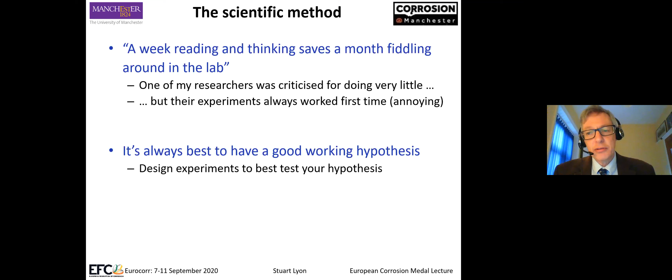One of my researchers was very much criticized for apparently doing very little by his colleagues, but his experiments always worked first time, which was very annoying to his colleagues as well. That's because he spent all the time thinking about what to do, designing the experiment correctly, testing his hypothesis using a thought experiment, and then running the experiment properly first time. That's really a good idea to go through life. I can't guarantee that all my work has been like that, but hopefully some of it, or some of the most important parts of it, have been.

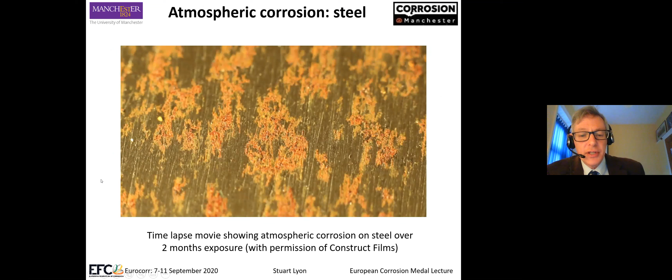So what do I work in? Well, I'm running through a program of atmospheric corrosion. I was hired to do atmospheric corrosion. And this rather lovely movie shows atmospheric corrosion on steel over 2 months exposure.

As you can see, we can see apparently filiforms running across the surface. This is not a painted piece of steel, this is just bare steel being time-lapse photographed. We can see these little filiforms running all over. We can see little deposits of salt here. After 2 months, significant parts of the steel are still bare. So these are obviously where the anodes were, and maybe these are cathodes, or maybe they're passive - we just don't know. I love that so much, we're going to run it again.

So if you're not seeing corrosion in action, this is corrosion in action. Atmospheric corrosion is a fascinating subject because it is so potentially difficult.

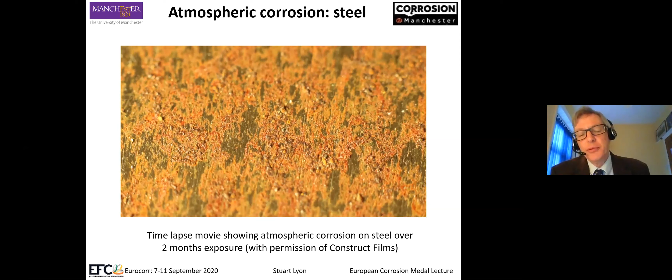The corrosion rate of steel in the atmosphere is quite similar to the corrosion rate of steel immersed in seawater. Why would that be? Seawater should be more aggressive than the atmosphere. So there are many interesting questions.

We needed to prepare naturally rusted iron samples for an experiment I'll show you shortly. We put 16 wires embedded into an epoxy mounting resin, put them on the roof of our lab in Manchester, roof of the building I showed you earlier, and we expected them to corrode within a week. However, after a week, only 4 had corroded and 12 were uncorroded.

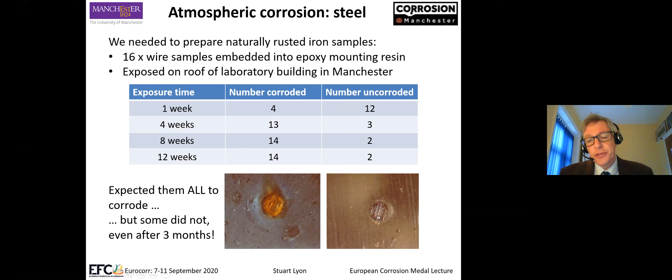Even after 3 months, 2 of them were completely uncorroded. The rest of them were all rusty. That's quite interesting as well. Why would that happen? This implies that there is something controlling or stopping that corrosion from occurring, probably because the material is passive.

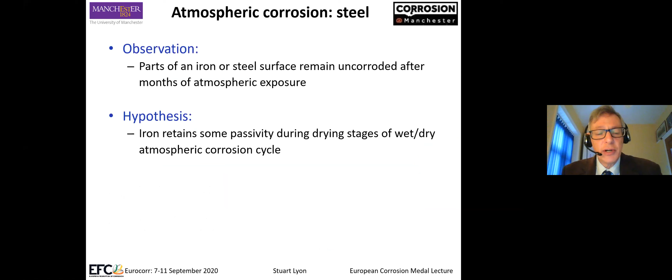So based on this observation, one of the hypotheses I ran with first is that iron or steel retains some kind of passivity during the corrosion process in the atmosphere of wetting and drying. If we have evaporation condensation cycles, we can see after a very short period of time, 4 to 5 wet-dry cycles, the steel reaches a passive state.

If we do electrochemical experiments in really dilute electrolytes, this is 10 to the minus 4 molar sodium sulfate, then the passivity becomes easier as the electrolyte thickness decreases from the bulk to the 100 microns.

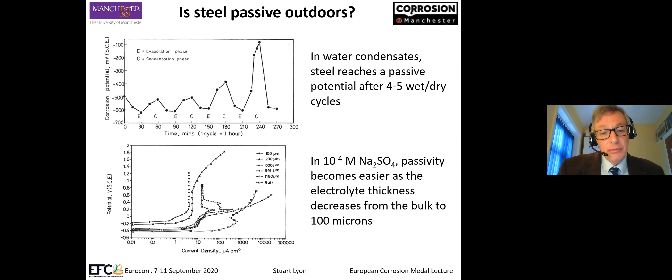A question that came up with the review of the paper was whether this is all IR drop in the electrolyte. So we check that by increasing the electrolyte concentration by adding 2 drops of 0.1 molar concentrated sodium sulfate. Passivity stays the same, IR drop is reduced, and we retain passivity.

However, if we add chloride, it immediately starts pitting and we get a big increase in current. So the material is indeed passive under these conditions.

Going on from atmospheric corrosion of steel, Evans' electrochemical theory was based on the redox cycling of iron oxides during atmospheric corrosion. Again, a hypothesis arising from the Evans model is that the reduction of iron oxides formed during corrosion is kinetically faster than the oxygen reduction reaction.

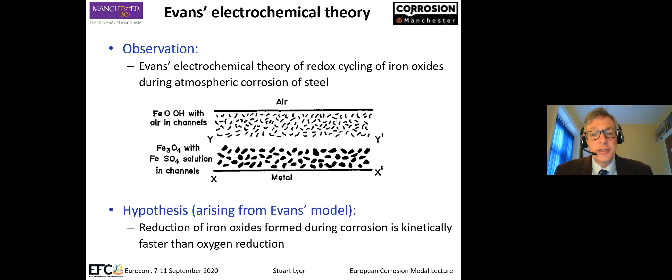And again, we check that. You can see now why I wanted rusty electrodes, small electrodes on the surface of the sample. Here is our shiny uncorroded system, freshly polished. So this is the oxygen reduction reaction. It's about 50 microamps per square centimeter, which is about right.

For a small electrode, you have radial diffusion, which increases the nominal rate. However, on a rusty surface, our corrosion rate, or our cathodic current at the same potential, is much, much higher. The only reason that can possibly be is that the reduction of iron oxide is kinetically a lot faster than the reduction of oxygen.

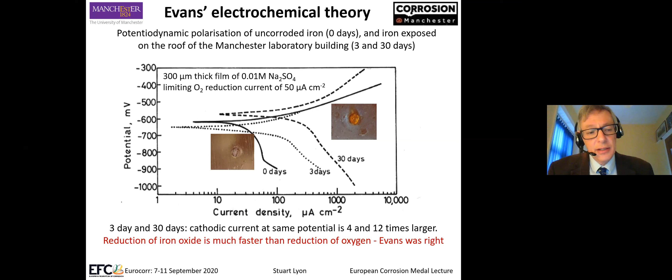So Evans was not able to do this experiment in his day, in the 1960s, but he was right. He had great prescience.

Moving on a little bit further, now on to stainless, still passive materials. This research came out of the nuclear industry, where they're interested in retaining nuclear waste in stainless steel containers for forever, essentially. And they were running with this comment, which is very, very common.

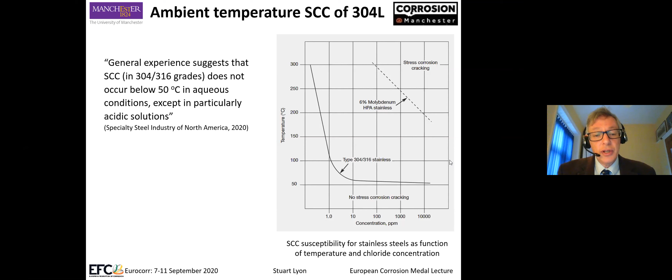General experience suggests that SCC of stainless does not occur below 50 degrees, except in particularly acidic conditions. And this is still being stated by the SSINA in 2020 on their website. That's a wonderful thing if it was true. Unfortunately, it's not true. It does happen.

This is 50 degrees, less than 50 degrees, and we can see underneath insulation, we do get stress corrosion cracking, but we get stress corrosion cracking even in the absence of insulation in a service environment where the temperature is well below this 50-degree limit. The question is why that is.

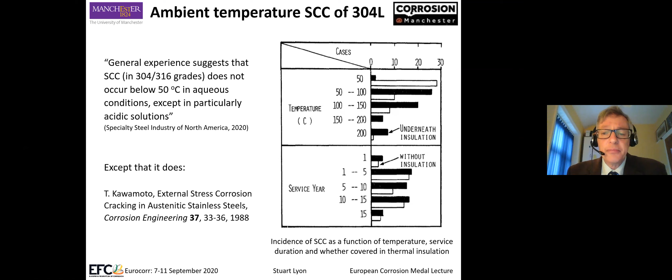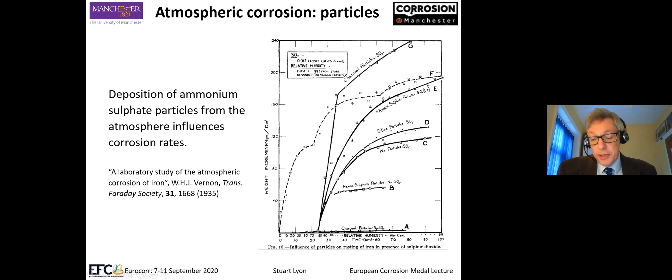So you then have the hypothesis that since ammonium sulfate isn't present in the atmosphere anymore, perhaps it's sea salt particles that give rise to this ambient temperature stress corrosion cracking of austenitic stainless steel, because it's well known that particulate deposits can influence atmospheric corrosion.

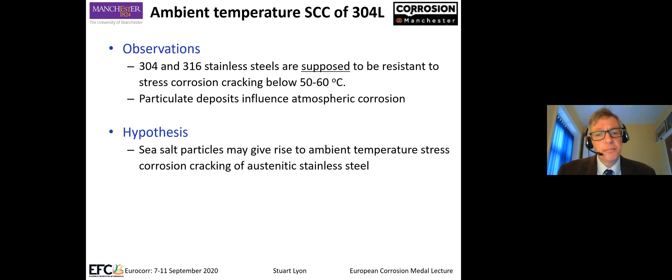So we did this small tensile experiment using a proving ring with this wishbone sample, bow tie sample. At 40 degrees centigrade, although we've run these experiments down to about 20 degrees centigrade, the initiation time for cracking just takes longer and longer.

So at 30% humidity, most of the sea salt solutes have precipitated. You're just left with about 6 molar magnesium chloride. So if anyone does experiments at boiling magnesium chloride, it's about the same molarity.

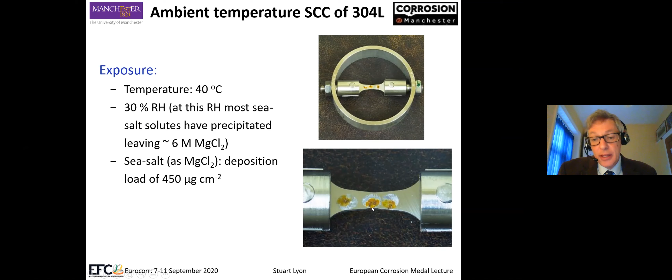So you can see these samples have cracked here. And what we wanted to do is see if we can image these cracks over time to get a crack growth rate, and then use fracture mechanics analysis of the sample to understand what the K1SCC fracture mechanics threshold for cracking was. I'll just run this animation.

You can see the crack. As the crack develops, this scale here, color-coded scale, shows the lateral movement in the sample by digital image correlation, and we can see the crack is actually bifurcated at that point there. There are 2 cracks here, so there's a pit, crack has grown that way, but it's mainly grown that way.

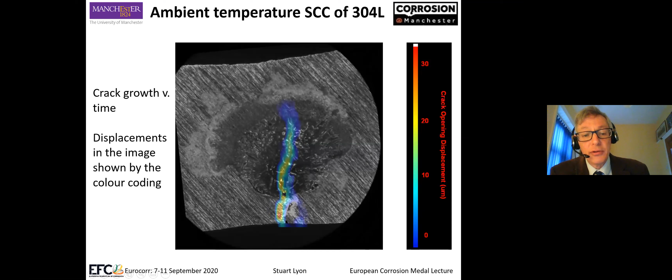So the pits initiate under salt droplets, and stress corrosion cracking initiates in this pit after some kind of initiation time, a delay time, in this case round about 1650 hours, that's about 10 weeks.

And by measuring the linear displacements using this digital image correlation, we can get a crack opening displacement, which we can turn into a crack tip stress intensity factor.

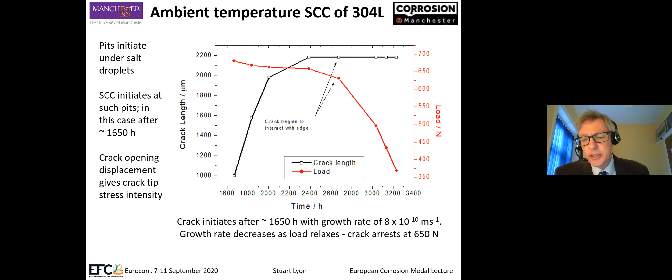So in this particular analysis, we can calculate the load from the unloading curve on the proving ring. And the crack initiates, as said, after about 10 weeks, with a crack growth rate of about 8 times 10 to the minus 10 meters per second. And the crack growth rate decreases as the load relaxes, and the crack arrests at 650 newtons. This is not a constant load experiment because of the nature of the proving ring.

So we turn that into a fracture mechanics approach. We find that the crack, in fact, initiates at a stress intensity of 10 megapascal root meters. That actually is the K1SCC for macroscopic compact tension samples. So it's exactly analogous to a macroscopic example.

So stress intensity rises as the crack grows until edge interaction causes the crack to arrest. Essentially, that's a fracture mechanics interpretation of the crack arrest event. So the fracture mechanics stress intensity rises, and as it hits the edge, it falls back to the level.

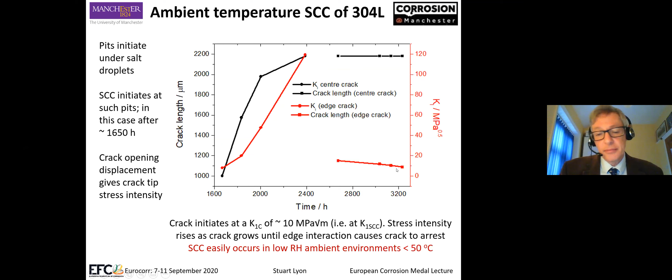So how do we control atmospheric corrosion? This got me into protective coatings. We can remove water, we can dehumidify the system, we can remove the oxidant, we could use contact corrosion inhibitors in wrapping and packaging, we can use vapor phase corrosion inhibitors. But all those are very well known mechanisms of how they do it.

However, we could use protective organic coatings. We have a polymer binder in such cases, we have solid leachable active species such as chromate. We have pigments in the nano to micro size. So we can paint, we can call it a functional polymer matrix composite material.

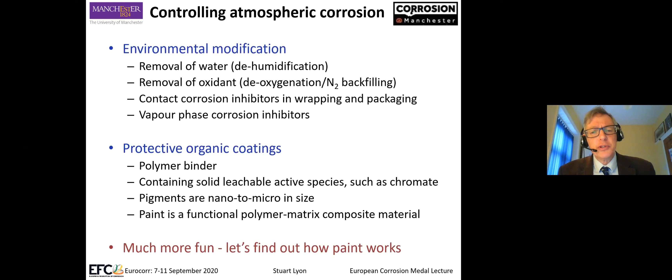I quite like to use that description of a paint because it sounds much more scientifically exciting than just paint, because that's exactly what a paint is. It's a complex formulated product. So it's much more fun to figure out how paint works than to remove oxygen from packaging.

So the first thing we looked at was chromate in paint, as many people have. Chromate is a really effective corrosion inhibitor for organic coatings, and replacements for chromate are mostly inferior. One hypothesis was that chromate passivates steel underneath organic coatings, and other effective inhibitors therefore must do the same. It must be said, of course, that chromate at these low concentrations doesn't really passivate things.

If you do an electrochemical experiment, you find that chromate acts as a cathodic dominant inhibitor rather than an anodic inhibitor, because of the precipitation of chromium-3 oxide, reduction of chromium-6 to chromium-3 at the cathode.

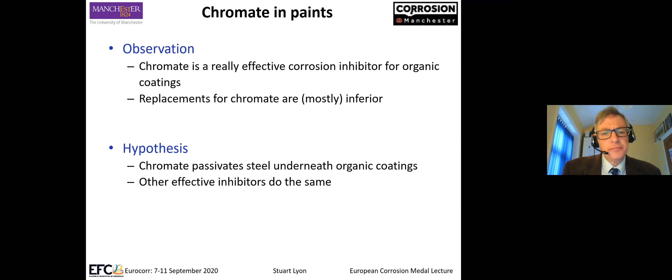However, we used a scanning Kelvin probe to analyze this. This is a polyester coating, loaded either with strontium chromate or with an alternative phosphate-based inhibitor, or blank. We drilled, or laser ablated, a defect in the coating at this location, and ran the Kelvin probe over it after exposure.

What we found was that the chromate, in essence, didn't do anything to the exposed potential, but it raised the potential of the substrate underneath the paint. So if you imagine that the potential difference between the defect potential and the substrate potential drives the coating disbondment process, then that's how chromate works.

In the absence of chromate, we have this big potential here, from here to here in the blue line. In the presence of chromate it's much, much less - the driving potential for coating disbondment is much less. Chromate is present in this case at about 700 ppm in the leach state, at saturated solubility.

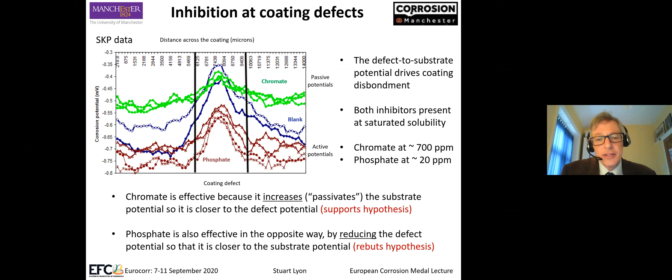So that was one of the first things we did with paint. We then moved on to coil-coated steel. The big thing about coil-coated steel is the cut edge. It's a very well-engineered system: steel core, a zinc or zinc alloy coating, chemical conversion layer, primer containing the inhibitor, and on the top face a visually attractive material with UV protection and appearance.

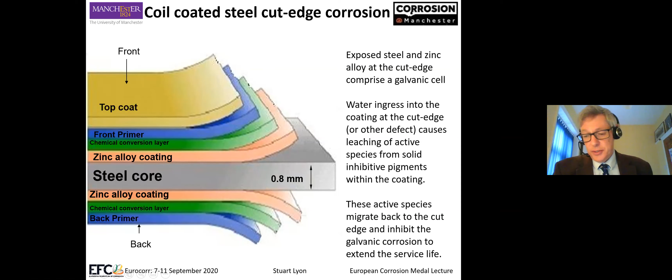So exposed steel and zinc alloy at the cut edge comprise our galvanic cell, and essentially this is the big driver for corrosion of these systems. Unless the surface is damaged in some way, the cut edge is the only exposed area. Water ingress into the coating at the cut edge, or maybe another defect, causes leaching of these active pigments to that edge. They migrate back to the cut edge and inhibit the galvanic corrosion, extending the service life.

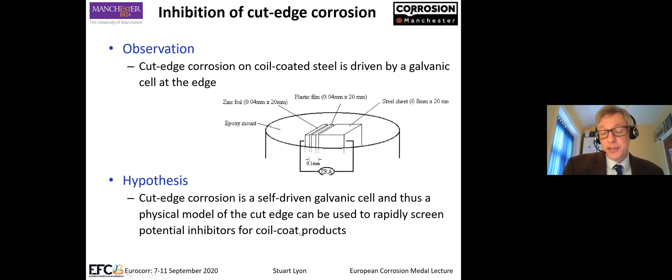So on that observation, we said that cut-edge corrosion of coil-coated steel is driven by the galvanic cell. Our hypothesis is, because it's a self-driven galvanic cell, if we use a physical model of the cut edge by putting small bits of zinc or zinc alloy separated electrically from the steel at roughly the same aspect ratio for exposed area, we can rapidly screen potential inhibitors for coil coat products. And indeed, that's what happened - rapid cut-edge inhibitor evaluation.

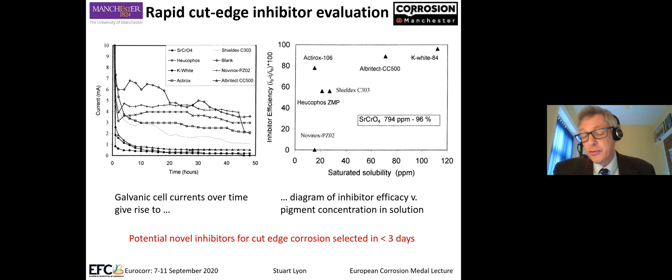So we can check some of these are quite good. There's no point using Novinox because it's no good, but there is a point in trying out K-white in a formulated product. This does not tell you whether the formulation works or not, it just tells you which ones you might best go for.

Moving on a little bit further, coatings have to stick to the surface in order to survive. If they don't stick, they fail and corrosion occurs. Our hypothesis, due to Funke, was that coatings with the best adhesion also have the best performance against corrosion damage. So we did this work where we took a number of different treatments of steel: degreasing, etch priming, grit blasting, phosphating, a reactive electropolymer, and a reactive alkyd silane.

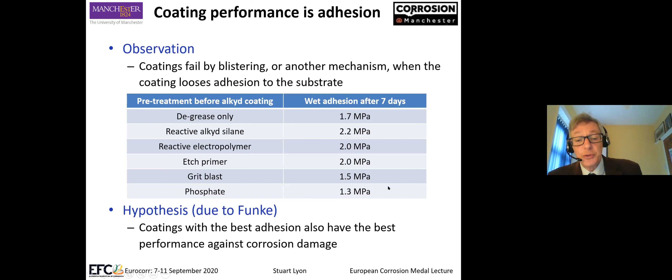These are materials where we have functional groups added which are designed to chemically link into the backbone of the polymer. The reactive alkyd silane had by far the best wet adhesion after 7 days, and the phosphate had the worst wet adhesion after 7 days. And yet the phosphate gave by far the best performance, and the silane treatment by far the worst performance.

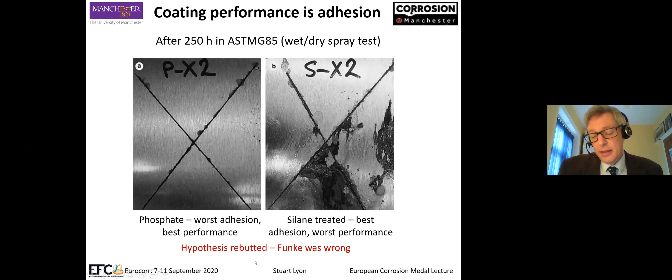In fact, the paint has been almost completely delaminated here. It's just holding on by the skin of its teeth, as we say. So after 250 hours in a wet-dry salt spray test, we can easily rebut the adhesionist performance hypothesis. Funke, in that case, was wrong.

So if coating adhesion doesn't control performance, then what does control performance, particularly cathodic disbondment performance? We need to be worried about the generation of high local pH due to oxygen reduction, and also the generation of peroxide radicals, which are part of the mechanism for the multi-step reduction of oxygen. Then perhaps if we create a coating substrate chemistry that's relatively resistant to these activities, we will get something that works a bit better.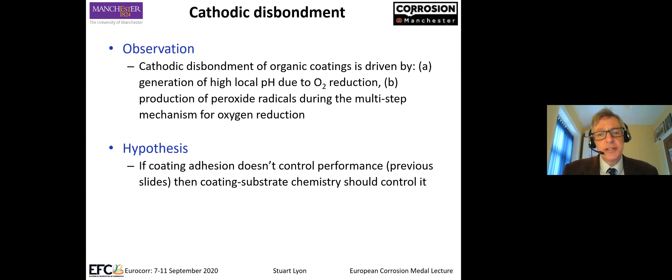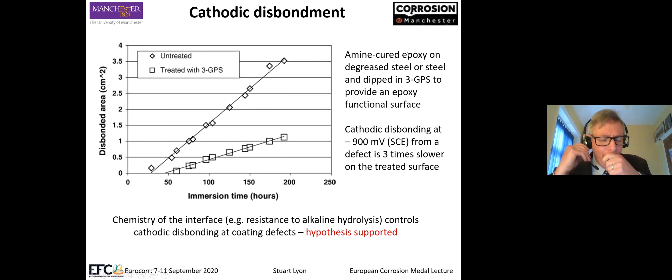So if we create a surface chemistry that's resistant relatively to alkaline hydrolysis, then we can control or reduce the cathodic disbonding at coating defects. That hypothesis is therefore supported - a properly chemically treated surface will indeed reduce the cathodic disbonding rate.

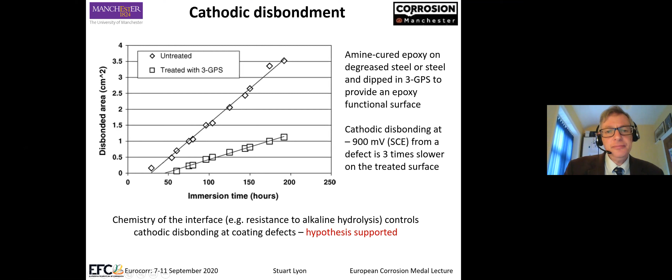And this is another one which was always in the literature: water absorption into polymers is easily measurable and accounts for the observed changes in electrical resistance of coatings. This was discovered way back by Mayne and others in the 1960s.

This is one of the ways we can look at water absorption, by infrared absorbance. This is the IR absorbance band, and this is quantitative to water uptake - the area under that curve. So we can determine the amount of water present in the coating by reference back to a standard.

So the hypothesis we have: water migrates, but ions do not migrate in polymer binders. Lots of people have said this - sodium chloride does not attack the steel due to its low ionic permeability, and the permeability of anions such as chloride are extremely low. Lots of people have said that.

I have to say, thinking about it, if those things are true, then things like desalination, polymer desalination membranes, can't possibly work. But hey, we'll do the experiment and find out.

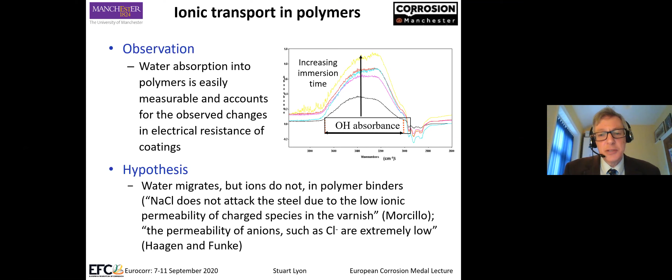So we used infrared monitoring of hydroxyl bands and phosphate bands in paint from half-molar sodium hydrogen phosphate at 40 degrees C, in an ATR, attenuated total reflection, geometry.

We can see the water band is very steady, a lovely Fickian diffusion. The phosphate band is much more noisy because there's much less of a signal there to take, but we can see very clearly that the phosphate diffuses in at the same rate as the water. So they increase at the same rate, so the hypothesis is rebutted - ions, or in this particular case phosphate, do migrate in epoxy binders.

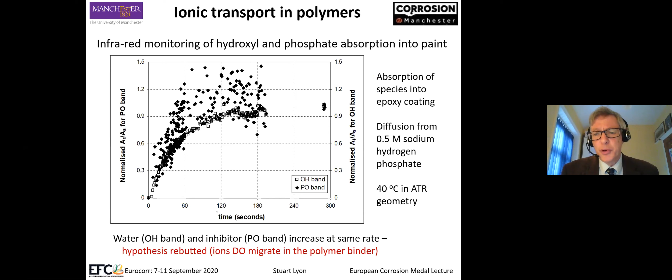So going from looking at how water and other species migrate, it's always been assumed that there is some degree of heterogeneity in epoxy and network cross-linked polymers. But from the polymer scientist's perspective, they have always assumed that cross-linked polymers such as epoxy behave mechanically like glassy solids, and therefore are almost certainly physically homogeneous, and probably chemically homogeneous as well.

So we were very lucky to get this atomic force microscope, which had a laser attached to it, which allowed us to do infrared analysis. Although the laser illumination was diffraction limited on the surface to several microns, the sensing area is dependent on the tip of the AFM, which is nanometers in scale. So we can do nanometer local analysis combined with our infrared spectroscopy.

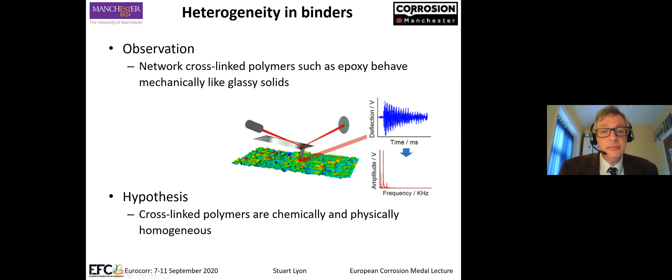So this is the AFM image in topography mode of a resin, which is cured at 150 degrees. It's an epoxy phenolic resin, and we can see it's very flat, 30 nanometers maximum variation in topography. This here is the infrared absorption at the secondary hydroxyl cure of 1116 for epoxy, and we can see this is heterogeneity of the order of microns.

Okay, so the resolution of this image is around about 50 nanometers, and we can see very clearly these are micron resolution, and these appear to be associated with some of these nodules on the surface. If you look at this one here, this is the epoxy, also part of the epoxy phenolic cure reaction. Again, we're seeing chemical heterogeneity at a micron size scale.

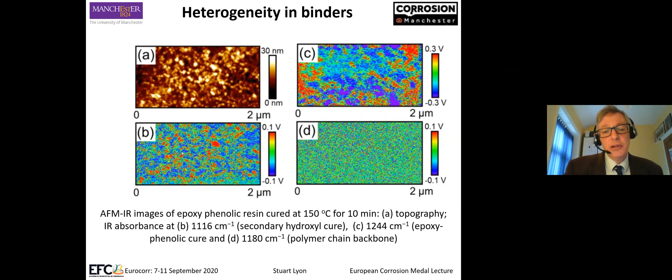And if we look at this here, just in case this was some kind of topographic artifact, this is the polymer chain backbone - the methylene wiggle in the polymer chain backbone, one of those methylene wiggles - and we can see it's uniform. So if we look at the polymer backbone, it's uniform. If you look at the individual chemical functionality, it's different. And that was the first indication that these polymers were in fact chemically different at a heterogeneous scale.

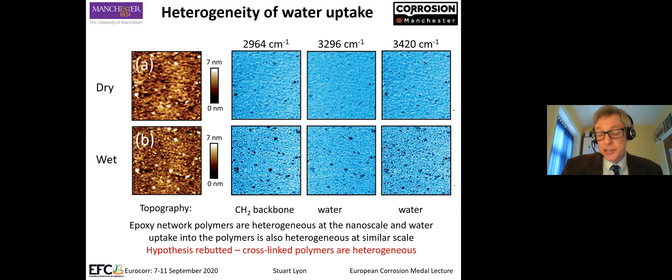So following on from that, should we expect water uptake to be chemically heterogeneous as well? And that is in fact correct. We can see these nodules coincide with increased methylene groups, so higher polymer density, and they're also associated with increased water uptake. So epoxy network polymers are heterogeneous at the nanoscale, and water uptake into polymers is also heterogeneous at a similar scale. So we rebut the hypothesis that cross-linked polymers are homogeneous - they are in fact heterogeneous.

So because a homogeneous polymer does not a paint make - paints contain pigments - we observe that in many cases, cavities are left in coatings after exposure to the environment. And we could postulate that these cavities form a pathway for solution ingress and for leaching of active species out of the coating. And if that's true, we can then start designing coatings from more of a mechanistic perspective than from a formulation best-guess perspective.

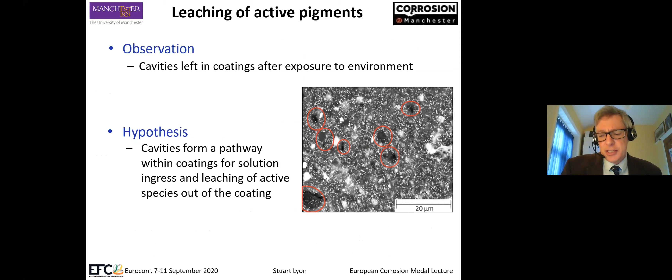And we did this work using a time-lapse video. Should run now, there it goes. This is a nano X-ray CT of leaching behavior from a particular kind of primer.

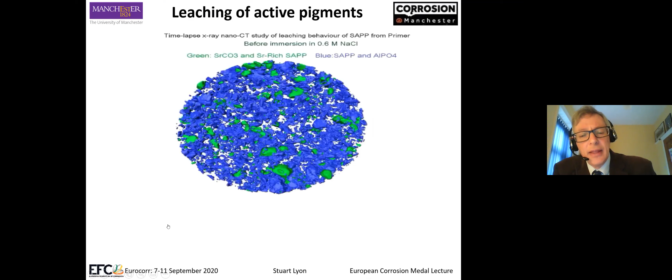We're color coding the contents of the primer now. The blue is the leachable component, and the yellow are the pores which are formed after a day of exposure. You can see the diffusion front just about penetrated through there. That's the back of the coating, and that's the front of the coating. And we can see these beginning to form connected pathways throughout the coating, sparse connected pathways, but connected nonetheless. And now they've penetrated after 7 days right the way through to the substrate, which is here.

Some of this functional material is not leaching, or not leaching within the resolution of the instrument, but some is. And clearly this is part of the mechanism. So soluble particles dissolve and leach, permitting environmental access further into the coating. And so we think that hypothesis is indeed supported in this particular case.

So my final example is surface tolerant coatings. Coatings always work best if oxides and other debris are removed first. So if you try and paint this, you know it's not going to work - you need to get rid of all that rubbish that's on the surface. So the hypothesis, on the other hand, is if we can somehow penetrate into that rusty, horrible mess there and bind it all together, then perhaps it can be stabilized from further deterioration.

And this is just an example of how you do the nano X-ray CT. There's the sample there, there's the X-ray source, and there's the detector over there. And from this, we can get a resolution, a volumetric resolution of just under a cubic micron.

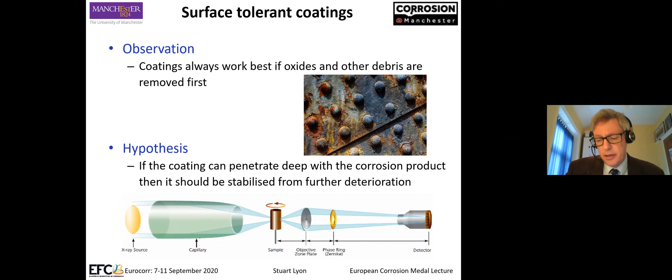So here we go, painting rusty steel. So do protective coatings really penetrate rust? I'm going to run this movie because it's fairly self-explanatory.